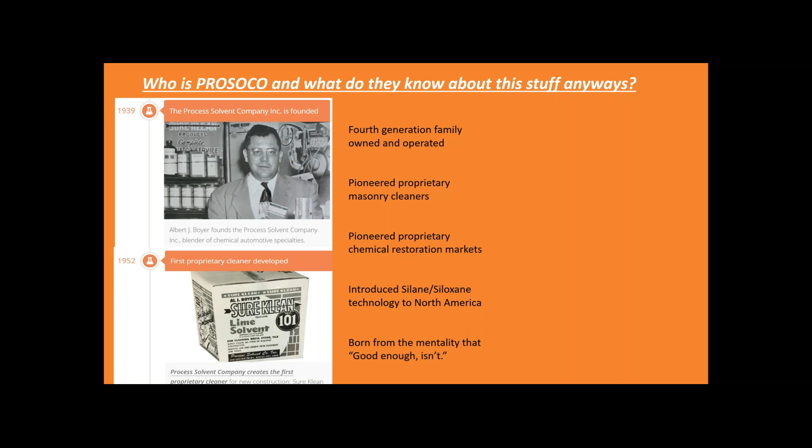We pioneered some of the first chemical cleaners specifically for masonry, as well as the new construction side, as well as in the restoration world. We introduced a line of water repellents, later introduced silane siloxane technology, which is very commonly used in protective treatment today. That's technology we brought to North America decades ago.

Really, we were founded and we still operate today under the mentality that good enough isn't. And we pride ourselves on that. So we've just celebrated our 80th year.

We've come a long way in 80 years from masonry, from what started as automotive products to masonry cleaners and protective treatments. We branched out to finished concrete flooring products, eventually building envelope products, and most recently through acquisition, we got into the masonry anchor world with the acquisition of CTP, or construction tie products, to tie it all together. Pun intended there.

So basically the moral of this story is you're not alone, and you certainly don't have to be an expert in cleaners and protective treatments. You just need to know one. I'd be happy to connect you with your local representatives after the call if you're interested.

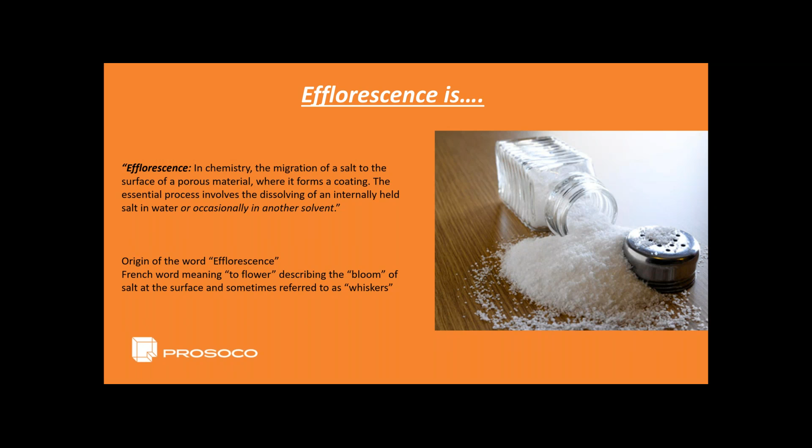We'll talk about some of those other stains that are very similar to efflorescence and how to address those. The origin of the word efflorescence is actually from the French word meaning to flower, which is how a lot of these other stains technically fall under this umbrella. It describes the bloom of the salt at the surface, sometimes referred to as whiskers.

What efflorescence most definitely isn't is effervescence, because that's not even a word. It's definitely not effervescence, that's something like Alka-Seltzer. And it's most certainly not evanescence, which is a 90s and early 2000s rock band. More often than not, the pronunciation of the word is butchered, and I get calls about these three: effervescence, evanescence, and other wrong variations. The correct way to pronounce it is efflorescence. So if you take nothing else away from this today, at least you'll know how to say it correctly now.

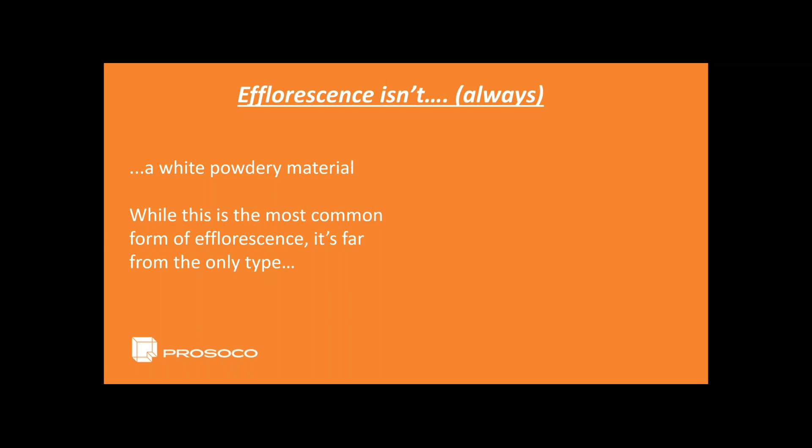What efflorescence isn't, or at least isn't always, is a white powdery material. While this is the most common form, it's certainly not the only type. Here's another example of something technically classified as efflorescence but that doesn't look like what we all know and despise as efflorescence.

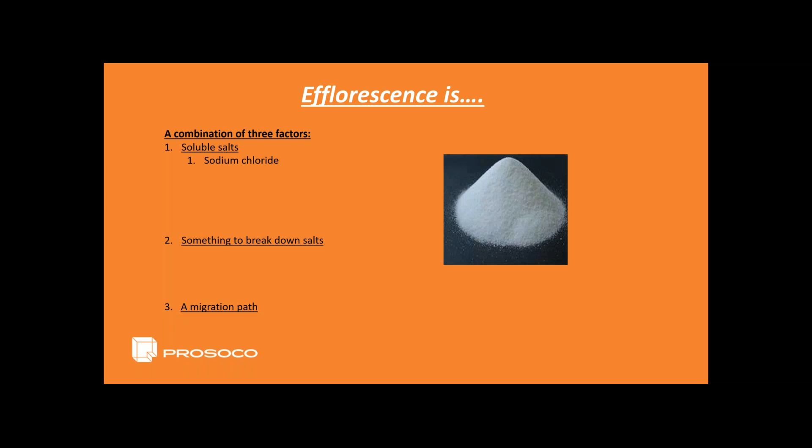What efflorescence is, is a combination of three factors: you've got a soluble salt of some sort, something to break that salt down, and a migration path for that salt, once solubilized, to work its way out to the surface. Some common forms of efflorescence are sodium chloride, calcium hydroxide, vanadyl sulfate, manganese oxide, and many more. Some of these are natural, some are man-made additives used for colors and other reasons.

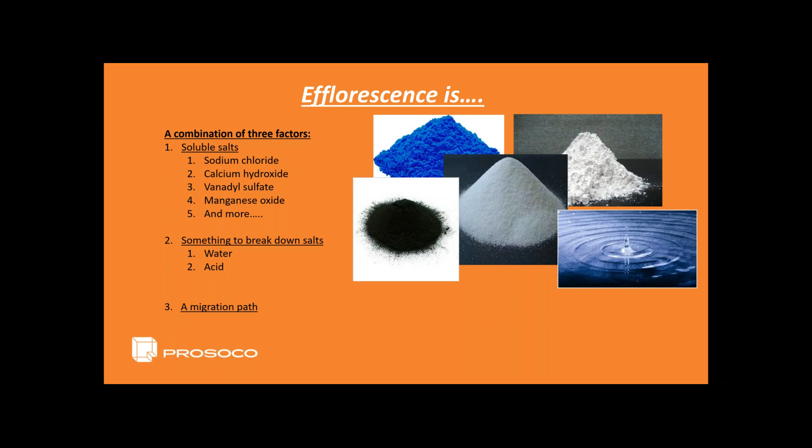Something is needed to break that salt down, with water being the universal solvent. By definition, a solvent is anything that will solubilize something else, so water is referred to as the universal solvent. Oftentimes it's an acid, and we certainly hope it's not muriatic acid - I'll touch on that probably more than once throughout this presentation, by force of habit if for no other reason. Sometimes it's some other solvent, whether a different cleaner or something of that nature.

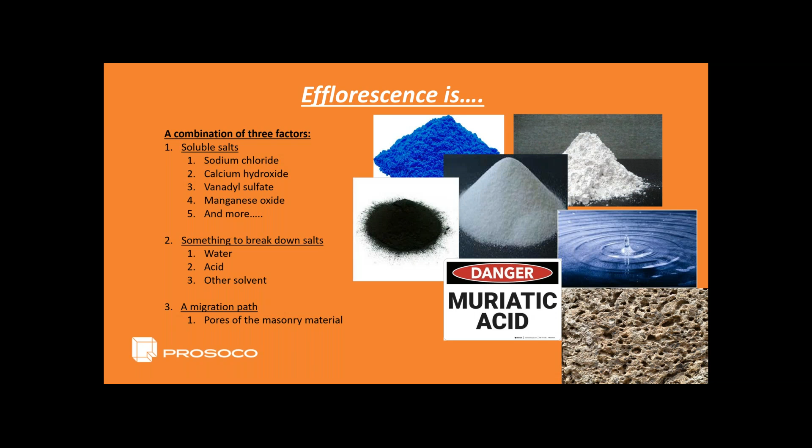As far as the migration path, the way that material gets out to the surface is that liquid, with the solids dissolved into it, works its way out to the surface. Nature, always seeking equilibrium, will move things from areas of high concentration to areas of low concentration. In the case of a masonry wall with a solubilized salt, you've got moisture within the wall, and outboard of that wall the air is drier, so that moisture works its way out towards the exterior face of the wall. As the moisture evaporates, it deposits the solids that remain onto the surface of the wall in the form of efflorescence.

As you can see here, there are a lot of different salts found in masonry, whether in the wall itself, from some sort of chemical combination as a result of a cleaning process or otherwise, or even maybe from just the surrounding elements.

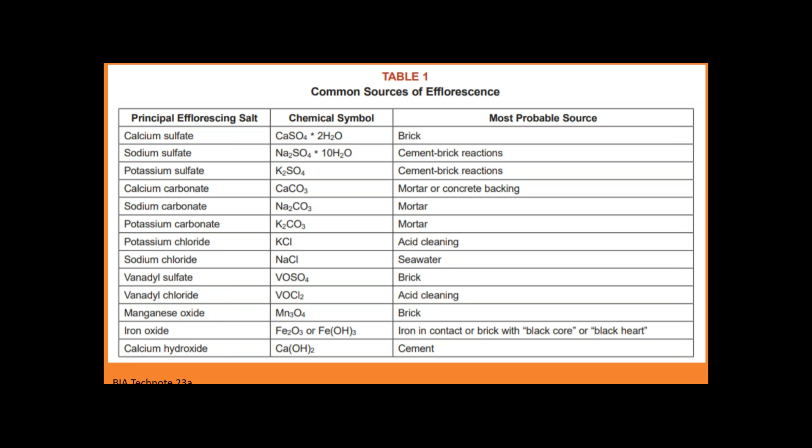Efflorescence is not always from the masonry itself, though. It comes from places like de-icing salts, maybe salt air or salt water. In a lot of cases, moisture or efflorescence can even come from the ground that we build upon, through a condition called rising damp, where capillary action absorbs the moisture and soluble salts in the ground and draws them up into the masonry from the ground itself.

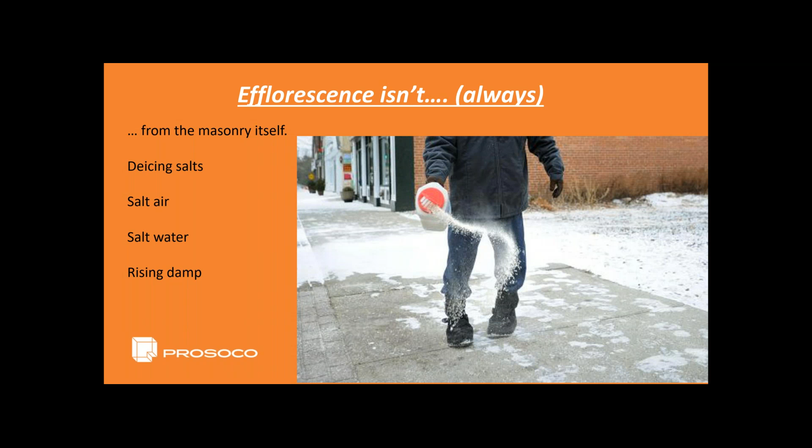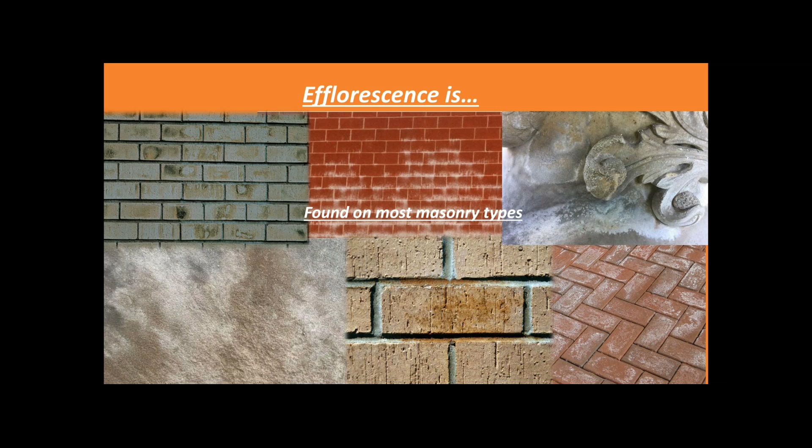Efflorescence is found in most masonry types as a result of that. There are a lot of different sources, whether it's direct from the substrate itself or surrounding elements or whatever it may be. It is found in most masonry types.

What efflorescence is, technically speaking, it's a word that can be used to define several different common masonry stains.

Efflorescence is also frequently caused by human error in some form or fashion, whether that's using the wrong cleaner or eliminating a step or a material through the construction process that results in more water in the wall, whatever it may be. It's frequently caused, or at least expanded upon, from some sort of human error.

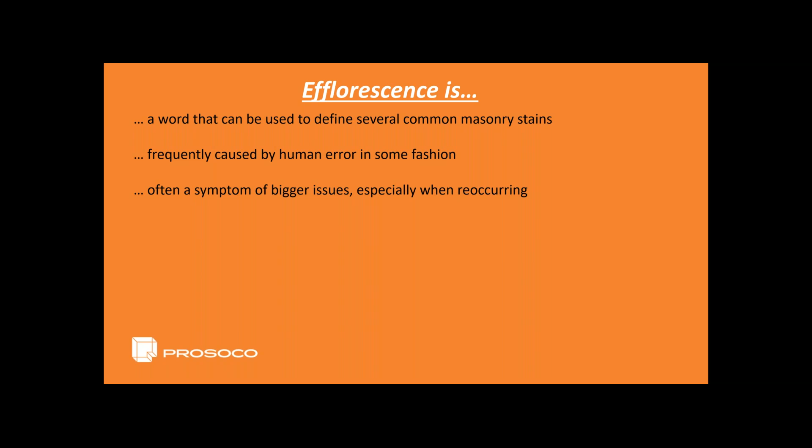Another thing that it typically is, especially in issues of reoccurrence, is it's often a symptom of bigger issues. Efflorescence may just be the thing that's visible, but there could be something else much more significant going on behind the visible surface.

Efflorescence is most commonly known as that white crystalline deposit of water-soluble salts on the surface of masonry, and that's kind of how we'll refer to it for the majority of this presentation, but do know that word can be interpreted in different ways.

The common efflorescence that we're all familiar with is relatively easily treated given the right tools and products, and certainly once it's been accurately diagnosed. However, it is commonly misdiagnosed. I get a lot of calls anytime somebody sees anything white on the wall at all. They refer to it as efflorescence or effervescence or evanescence or whatever it may be. So we'll talk a little bit about how to diagnose that.

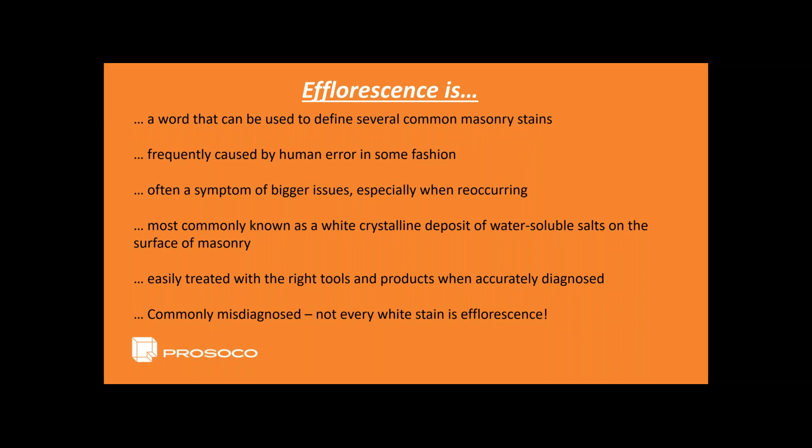The one thing that's for sure, and that we can all agree on, wherever you're at, wherever your experience level is, efflorescence is a real... you get the rest. I'll give you a second to contain your laughter there as we move on.

All right, so now that we all know what efflorescence is and what it isn't, what can we do about it? How can we help prevent this?

Well, like many things in life, if you plan and act accordingly, prevention is more significant and better, the best first step to a cure. It's greater than the cure itself. So how do we prevent efflorescence?

Prevention begins long before the building ever breaks ground and long before you ever start constructing that wall, but it actually begins in the design phase. So the first thing we can do is design our buildings—depending on what your expertise is, if you're the contractor or the mason, you may not have this luxury—but we can certainly promote it as an industry-wide thing to design our buildings to incorporate water management features.

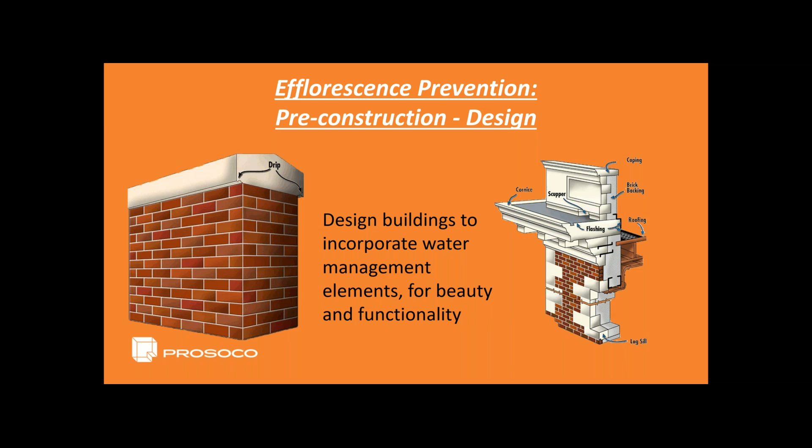They don't have to be ugly gutters and scuppers and things like that, but we can use these things for not only functionality, but for beauty as well. Here's a good example of a beautiful masonry building that's got a lot of excellently detailed water management features.

Now, we know there's not a lot of buildings built like this today, so what can we do in our more modern common masonry buildings that we see today? Well, we can start by specifying, at the very least, a water shedding joint profile.

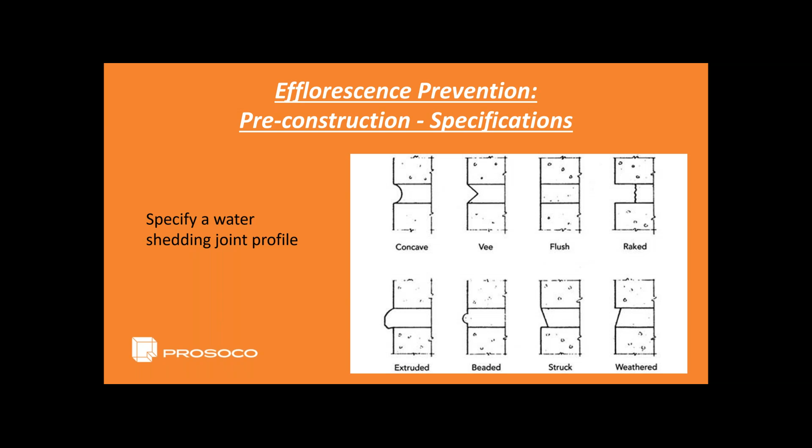Every time I step onto a project and I see a rake joint on an exterior wall, I cringe a little because I know it's much more likely to have issues than had they gone with a different joint profile. And once that wall is built and ready for its final clean down, still from the specification perspective...

We can specify a proprietary cleaner that's made specifically for the substrates on each project—not a product that worked on the last project because that was a different type of masonry, but a product that works specific for the substrates on this project.

Each substrate has a unique chemistry and requires a slightly different approach to effectively clean it without causing damage. That's our first step in any masonry cleaning operation: to first do no harm. It's kind of our Hippocratic oath that we borrow from other industries.

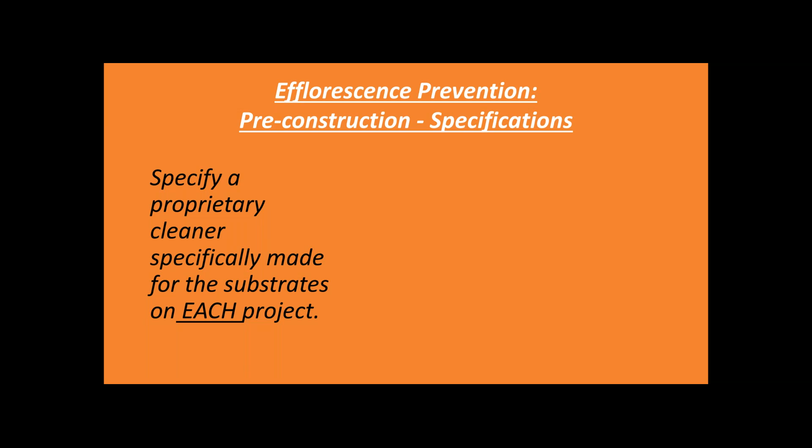While there are some cleaners out there that may claim to clean all masonry, we'll talk a little later about how just because you can doesn't mean you should. All industries, for that matter—masonry and otherwise, any industry where you're cleaning anything—recognize the importance of the appropriate cleaner for the substrate and the stain you're trying to remove.

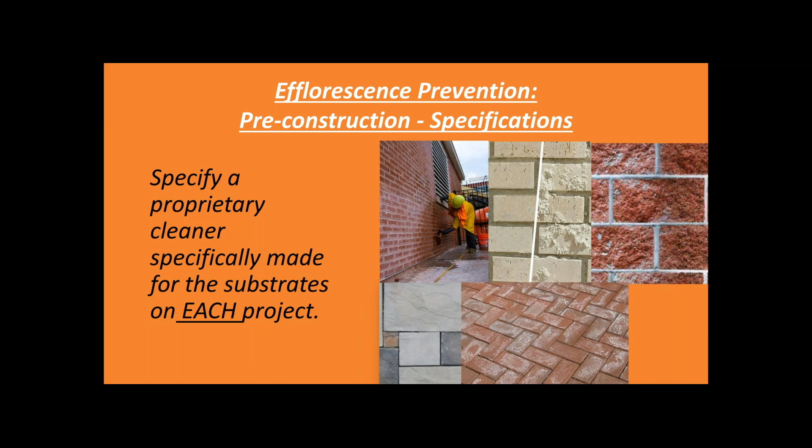One of the best and easiest ways that we can prevent efflorescence and many of these other common stains is to first never, ever, ever allow raw muriatic acid on your project to clean your masonry. For a long time, it was the only choice, but today it's recognized as one of the leading causes of a lot of different forms of damage in masonry. It's not because it doesn't work, and you can certainly make it work. You just need to be much more careful with it. There are a lot better alternatives to muriatic acid today.

This is kind of where the one-size-fits-all approach was born, because for a long time that was the only thing available. But all masonry substrates are unique in their chemical composition, and none of them like muriatic acid. Specifying a one-size-fits-all cleaner for all of your different masonry buildings and types is the next worst thing that you can do as far as causing damage and harm.

It's pretty much unanimous across the industry that one size does not fit all. And you don't have to take that from me. You can take it from all the authorities within our industry on the topic, which rarely happens, but they do all agree on a few topics. And that is that one size does not fit all for masonry cleaning. We should always seek to use the gentlest yet effective method, and products and techniques that are applicable to one masonry wall may not be applicable to others.

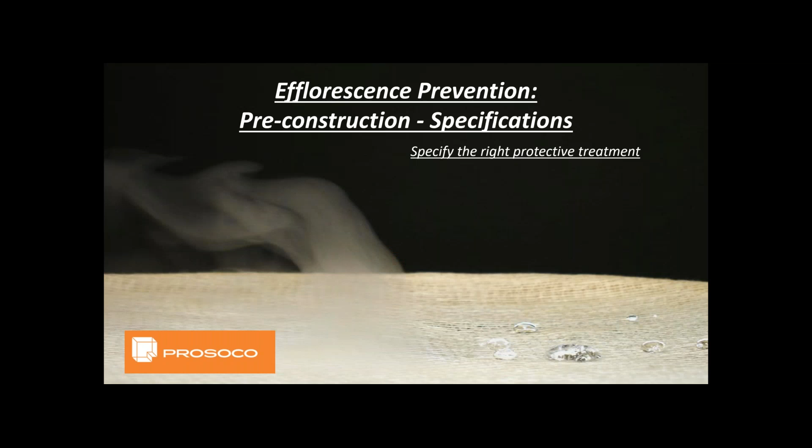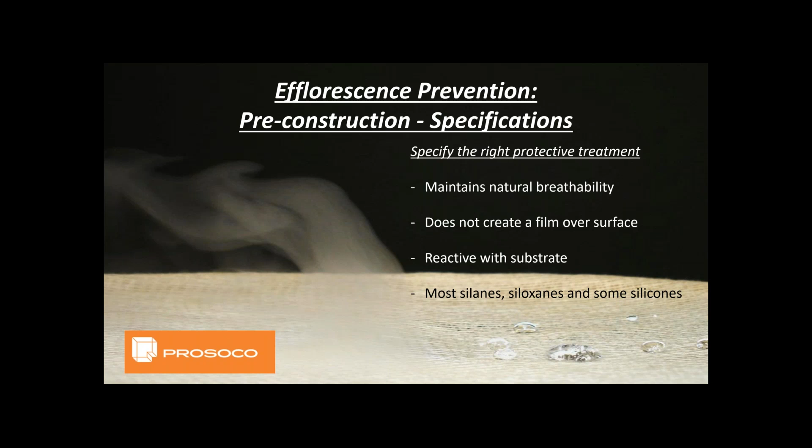So the next thing that we can do in the specification phase is we can specify a protective treatment. And we want to make sure that we specify the right protective treatment. We want to make sure that we specify one that maintains the substrate's natural breathability, one that doesn't create a film over the surface, and one that chemically bonds and reacts with the substrate that it's applied to. The most common chemistry that checks all these boxes are the silanes, siloxanes, and silicones of the world.

So now we're past the specification phase. The job is a go. We're ready to get started. What else can we do before we start constructing that wall to actually help prevent efflorescence as it goes up?

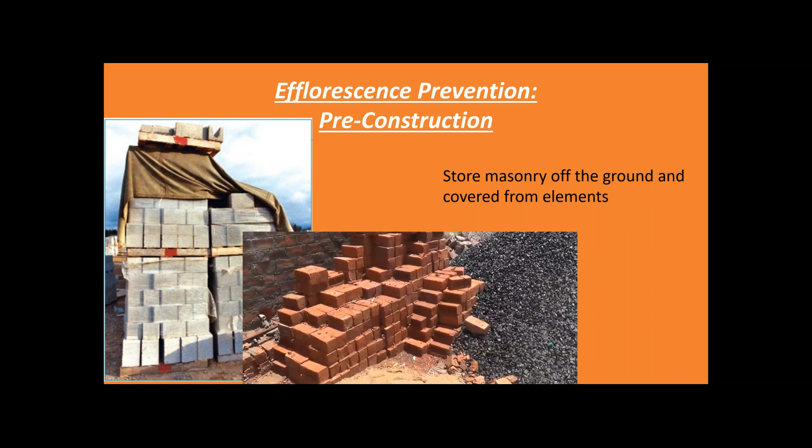Well, there are a couple more steps we can take. One may seem like common sense, but it's to store masonry off the ground and cover it from the elements. I can't tell you how many times I step onto a job site and see the masonry stored like this. It's a very common thing. Some guys take the approach of, I'll just deal with it later, but that's one of the easy steps you can take early on to help prevent efflorescence.

Next thing we can do is, as we construct that wall, build it with the understanding that water will get into it somehow, some way, whether during construction, during post-construction clean down, or through voids and cracks and deficiencies later on. So make sure that water has a route to get out when it does get in, through things like mortar collection devices, proper through wall flashings, weep holes, etc. Water will get into that wall, so ask yourself, have you provided a way for it to get out?

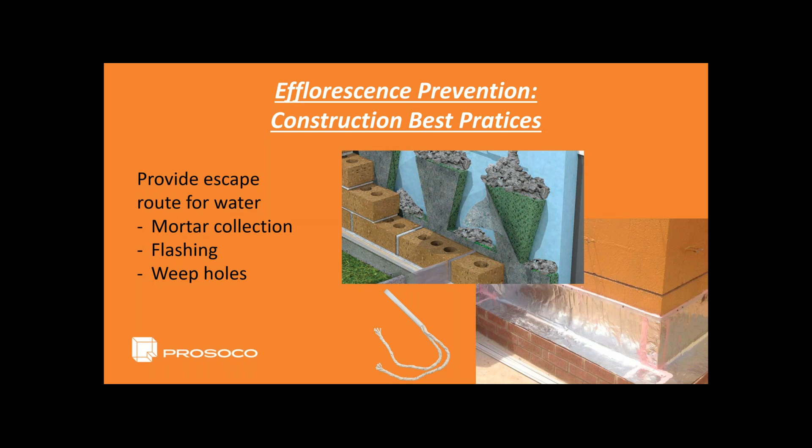The next thing we can do, as we build that wall, is follow best industry practices. Don't break out the 4-inch hole saw for the 2-inch hole, right? Make sure you're properly tooling all your joints. Make sure you caulk or fill any other voids. Make sure you're filling up your mortar joints completely. It's best practices—stuff I'd like to believe most people on this call know, but sometimes we just need reminders of those common sense things we forget about from time to time.

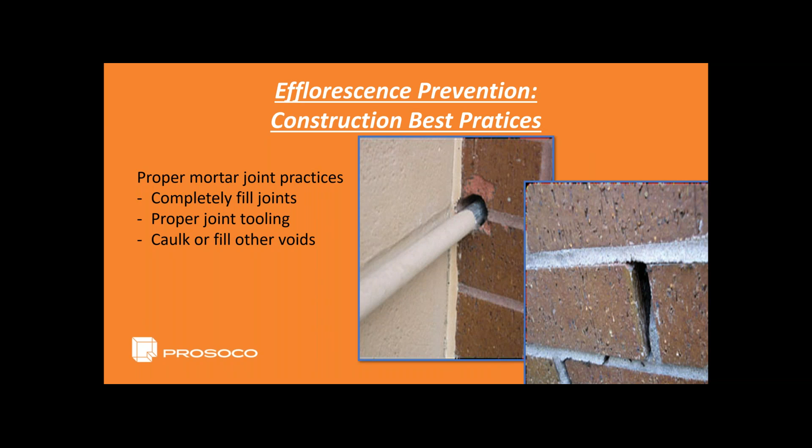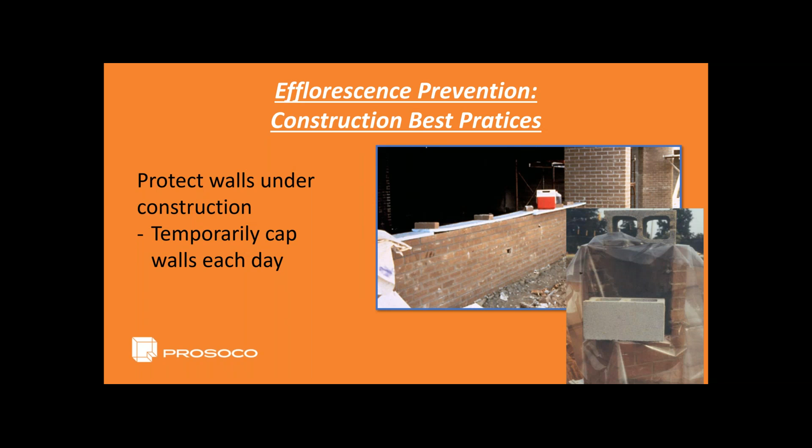Let's talk about the different methods and the do's and don'ts of removing that efflorescence if and when you do get it.

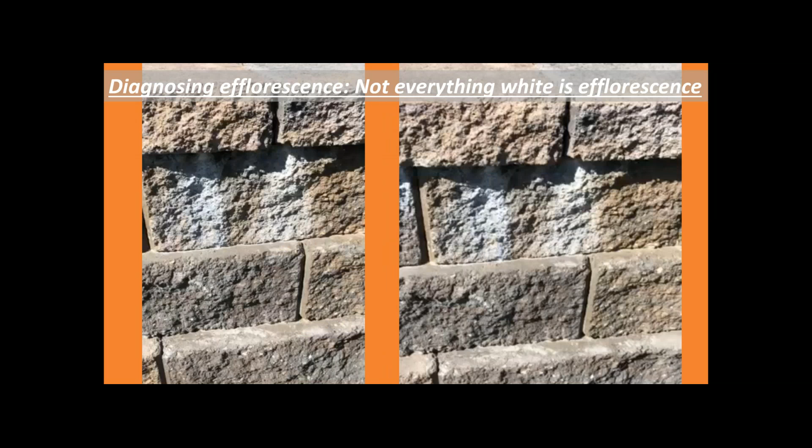So take a look at this one, for example. This is one that would be commonly misdiagnosed as efflorescence. So let's run it through the test we talked about for diagnosing. The first thing we're going to do is brush our hand across the wall and see if anything comes off on our hand.

Nothing came off on my hand there, so now I'm starting to believe this may not in fact be efflorescence. So I'm going to run it through my next test, splashing a little bit of water on the wall and seeing if it disappears. As I splash water on the wall, I notice that white stain has not disappeared at all. In fact, it doesn't seem to have been affected at all. So what's going on? Well, I don't have efflorescence in this case, and through those two quick, easy tests, I was able to realize that.

What do I have then? Well, I've got what's called calcium carbonate, aka lime run. Lime run is probably the one stain I get more calls about, where people say, hey, I've got efflorescence, need to know how to clean it. If I were to just answer that question and say use product XYZ for that, they would try that approach and be sorely disappointed when that product didn't even begin to touch what this stain may actually be. So what is lime run?

Well, it gets to the surface, and it could technically be classified as a form of efflorescence in the way that it's deposited at the surface and it blooms or flowers, if you will. But really what it is, is free lime within the masonry itself or within the mortar joints that has deposited on the surface. Over time, it reacts with the carbon dioxide in the atmosphere and goes through the process of carbonating, creating what we call calcium carbonate. So lime run does not disappear when it's wet.

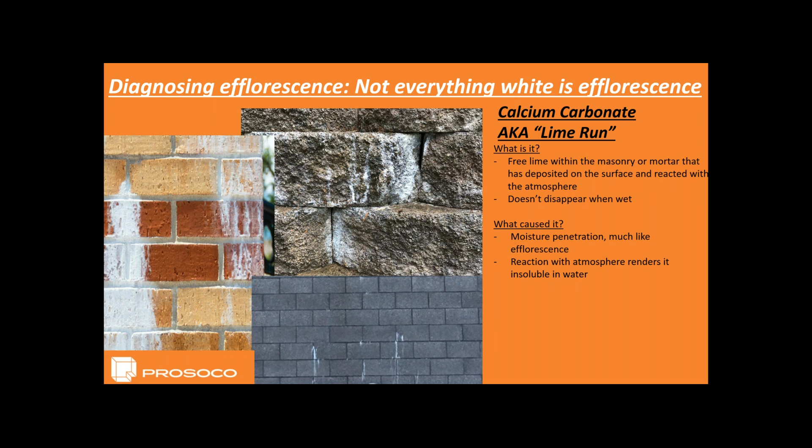What caused it? Well, it's the same thing that causes efflorescence: moisture gets into the wall, it solubilizes that free lime or calcium hydroxide, brings it out to the face of the wall, and as that water evaporates, it deposits it there. The difference with lime run versus common efflorescence is that the atmosphere has now rendered it insoluble in water, so you're going to need something more aggressive to get this stain to go away.

As far as removal, the first step is to always mechanically remove as much as possible. That's classified as the least aggressive means, and then use the proper proprietary masonry cleaner specifically designed to address that condition. How do I prevent it? Well, you just keep as much water out of the wall as possible—the same means of prevention as far as preventing efflorescence.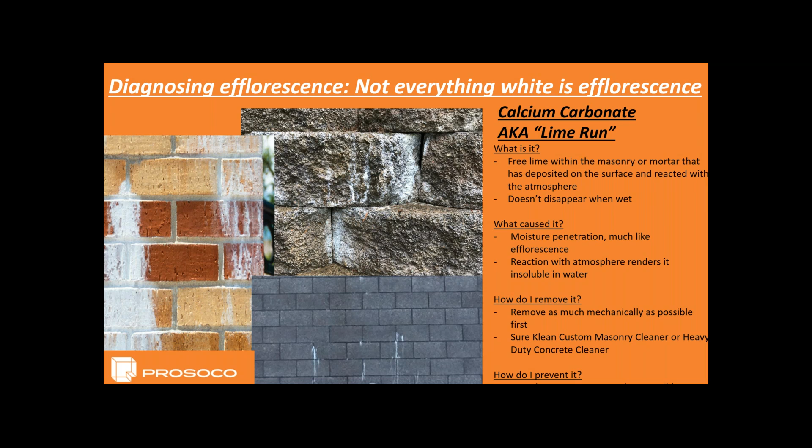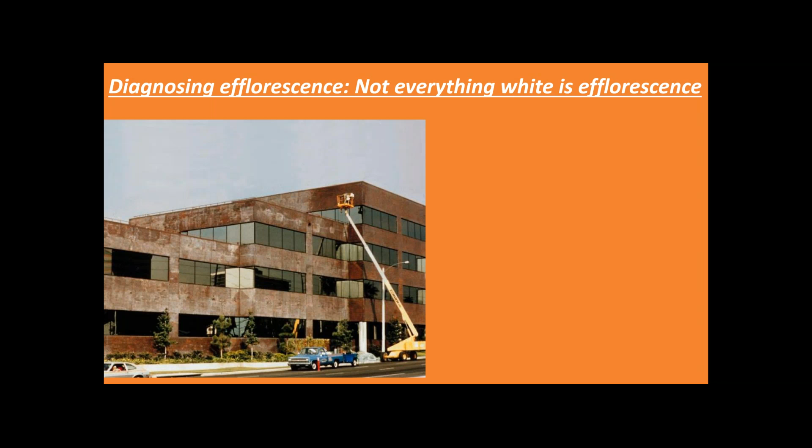So this is another one that pretty much everybody that looks at this picture, the first thing that goes through their mind is efflorescence. Well, if you look a little closer, what's actually going on here is a condition called sealer blush. What happens is you've applied a film-forming sealer over a substrate that had too high of a moisture content. Now, whether that was from a weather event like rain, or if you applied the protective treatment too soon after the initial clean down, whatever that may be, you've got moisture behind that film-forming sealer. This can also take place if you apply a breathable penetrating product far too heavy. If I put it on at 25% of the suggested coverage rate, I can have this condition as well. But sealer blush is another one that's commonly misdiagnosed for efflorescence. You can see why in the way that it looks.

The best thing you can do as far as removal is remove it with some sort of stripper or a product specifically designed to digest the component sealer is made of. And to prevent it in the future, use a non-film-forming, penetrating, breathable protective treatment. We'll talk a little bit more about that here in a minute.

Now this one, while it does technically fall under the classification of efflorescence, is actually more commonly diagnosed as something else, a biological stain. They see the green coloring and think, oh, I've got some sort of moss or algae or lichen growing on my wall. What it really is, is vanadium. What causes vanadium is those free vanadium salts that are oftentimes used within some manufactured masonry products, sometimes for color and other effects. But if they're dissolved in water, or oftentimes the most frequent culprit of this particular stain is muriatic acid, it gets in, breaks down those salts, and brings them out to the surface and deposits them there.

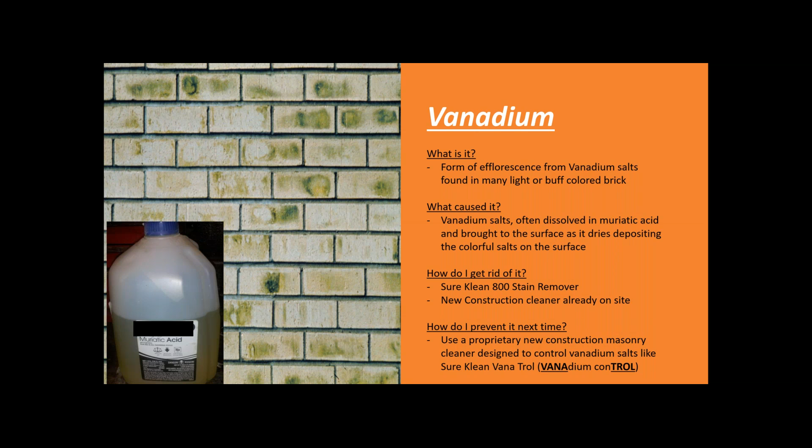Another form of efflorescence by definition is called brown manganese. This gets out to the surface in the same way all the other forms of efflorescence do, water, or again, this is another condition commonly caused by the use of muriatic acid. It breaks down that manganese oxide within the substrate and brings it out to the surface, deposits it there, where it is later rendered insoluble in water. Again, a proprietary cleaner specifically designed for that, both to remove it, and as far as prevention goes, using one specifically designed to prevent it.

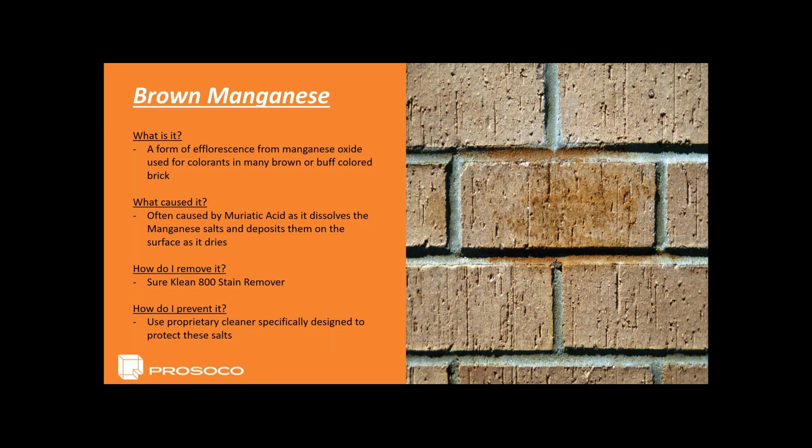So efflorescence, now we know what it is and what it isn't. We know some of the common steps and the easiest things we can do to prevent it, or at least reduce the likelihood of it happening. We know how to diagnose it when it does happen.

And we know how to fix efflorescence, as well as a lot of the other things that we thought were efflorescence. So it's finally time to address removal of actual common efflorescence.

One thing all industry organizations agree on is that you always want to start with the least aggressive means necessary that can get an effective result.

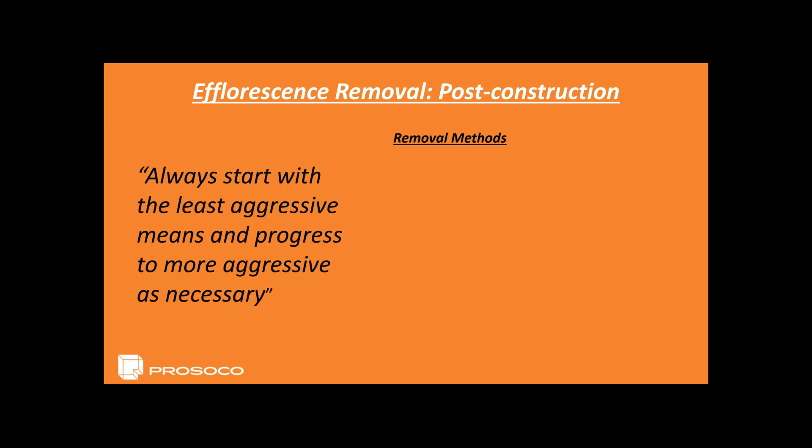As far as the different methods for removal, the least aggressive would typically be the mechanical removal method. You saw in some of those quick videos how loosely bound that material is to the surface. Oftentimes, just a stiff brush will brush common efflorescence right off of the surface.

You never want to use a metallic scraper on masonry, certainly not in combination with any form of acidic product. We all know metals and acids don't typically play well together.

In addition to, or in place of, a mechanical removal, a water rinse oftentimes can get the majority of that efflorescence off. Now, some of that may come back as it dries if you haven't fully dissolved it and removed it from the wall.

So that removal is often temporary. But one thing you certainly don't want to do is use high pressure, as you can drive that water deeper into the surface, making it harder for it to dry out, and in turn mobilizing salts that were at one point deep enough into that surface that they never would have naturally been brought out.

If you do need to step it up to the next method, chemical removal, make sure you're using a proprietary cleaner that's specifically designed for the substrate you're working on and the stain you're trying to remove. And always start with a mild dilution and work your way up as necessary.

If you start with a mild dilution and it's ineffective, the result is you still have the same condition you had. If you start with a very aggressive dilution or a very aggressive product, and it has adverse effects, those are a lot of times much harder to reverse, or in some cases even irreparable.

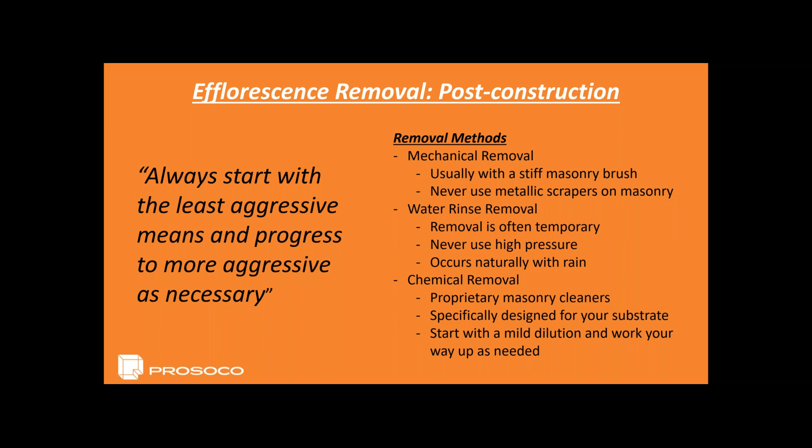I haven't driven back past it today, but I've got to believe that it's probably right back where it started, or close to. So what caused it? Well, it's the natural salts present in the masonry, oftentimes the ground itself, or even sometimes the air or the water that surrounds it.

In some conditions, salt water can cause efflorescence. You'll see that a lot of times on bulkhead walls around marine areas.

How do I remove it? Well, you're going to want to use, again, starting with a very mild product, typically a hydrochloric acid-based cleaner. If you've already got it on site and you're doing your new construction cleaning, a mild dilution of that can be very effective.

If you're there just to address the presence of efflorescence, you're going to start even a step back from that with some sort of other acidic blend. Ideally, phosphoric and gluconic acids have been proven very effective on efflorescence.

My personal go-to product is one of ours called light duty concrete cleaner. That's a very effective cleaner for common efflorescence.

And then as far as prevention, we talked about it already. Complete prevention is very tough, but you can do a lot of very easy things to reduce the chances and certainly reduce the significance of the efflorescence if and when it does bloom.

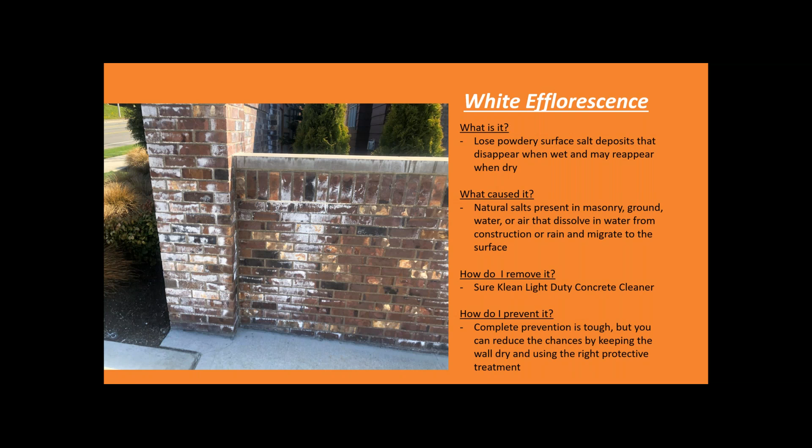And then as far as preventing reoccurrence, you want to make sure and use the right protective treatment to keep the water out of that wall once it's done. Once it's gone, you want to keep it gone by using the appropriate protective treatment.

Now, much like cleaners, there are different protective treatments designed specifically for certain substrates. Different types of stone contain different elements. Some contain silica, some are comprised of calcium carbonate. Those two react differently in the presence of things like silanes and siloxanes. I've got other presentations that really get into the specifics of that if you're interested. But for now, just know that you're going to want to use the appropriate protective treatment for the substrate you're working on.

And you want to make sure that it's breathable. You want to make sure that you allow that water, as it turns from liquid water into vapor, to work its way out. Now, this is a quick illustration.

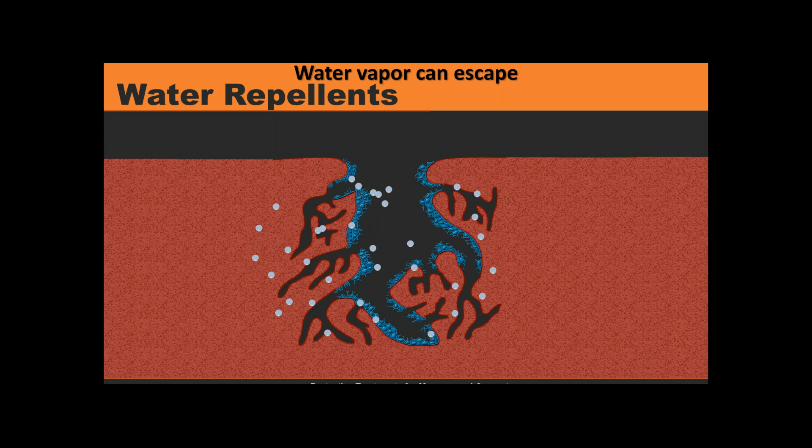But they work by lining the larger areas of the pore structure of that masonry, which allows it to keep the liquid water out, keep that large bulk water from penetrating, yet while still allowing the smaller water vapor molecules, as they're broken down, to work their way out of that substrate.

So when masonry is cleaned and protected, it's one of the most durable and one of the most beautiful and sustainable building materials that we've got available to us today. With a couple of easy steps to take during the pre-construction phases as far as prevention, during construction to prevent efflorescence and other stains by keeping water out of the wall, and thereafter by cleaning it with the appropriate cleaners and protecting it with the right protective treatments, we can make sure that masonry remains a viable choice for years and years to come.

So what did we learn today? Well, we learned what efflorescence is. It's a French word meaning to flower, which by definition can include a lot of other types of stains. We learned that in general, though, it's a salt of some form that's been deposited at the surface of the wall. We learned that it certainly isn't effervescence or evanescence or any other pronunciation.

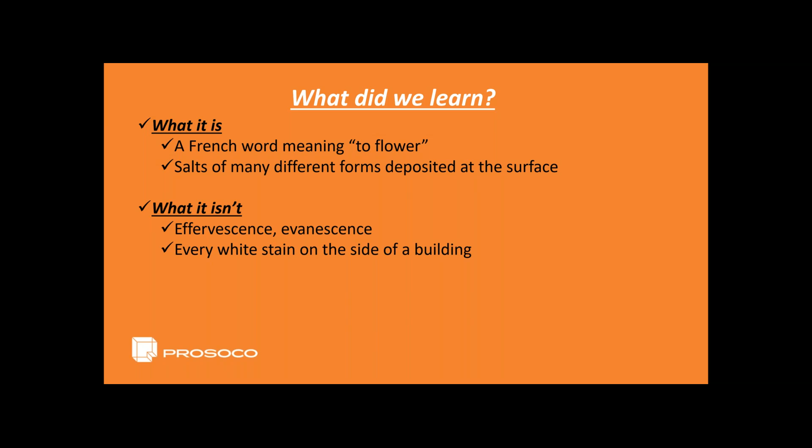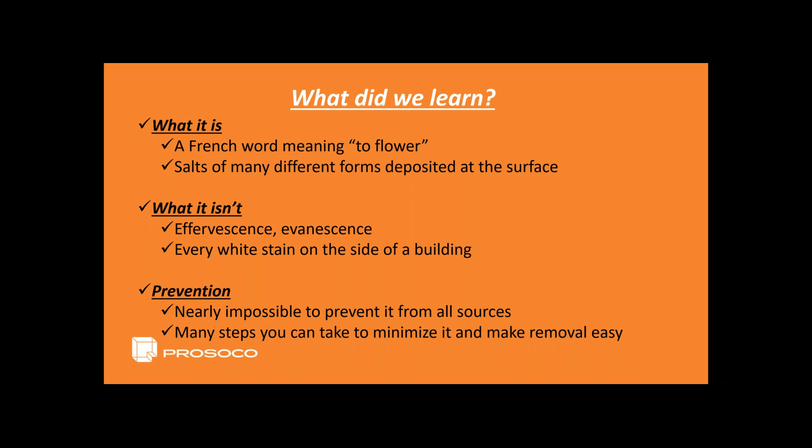And it's certainly not every white stain that's on the side of a building. It is responsible for a lot of them, but many of those other stains need to be addressed in a different fashion than common efflorescence. We learned that prevention is nearly impossible because of the number of different sources of that water and of those salts. However, there are a few steps you can take to certainly minimize it and make the removal much easier than those other conditions that may be much harder to remove.

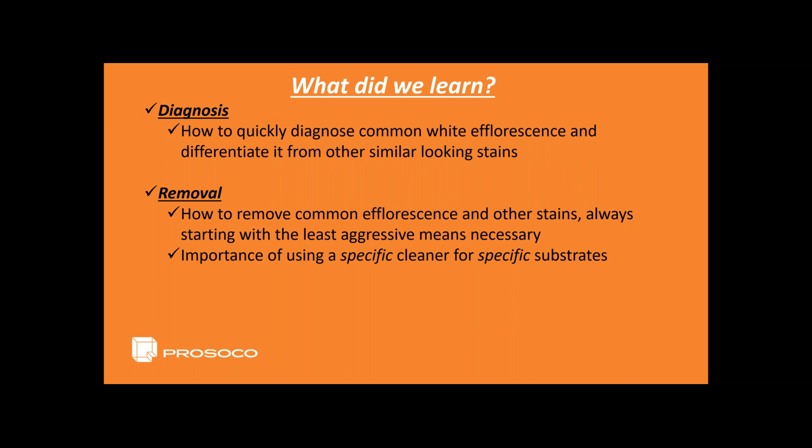We learned how to diagnose efflorescence. Just a quick splash of water or a brush of the hand or even a stiff bristled masonry brush can quickly differentiate common efflorescence from other similar looking stains. We learned how to remove it, as well as a lot of those other stains, by starting with the least aggressive means necessary and working your way up. We learned the importance of a specific cleaner for the specific substrates, and that one cleaner does not do it all, or at least shouldn't do it all.

And we learned about protection and how to make sure that we reduce the amount of water that gets into that wall before, during, and after construction being done with the proper protective treatment.

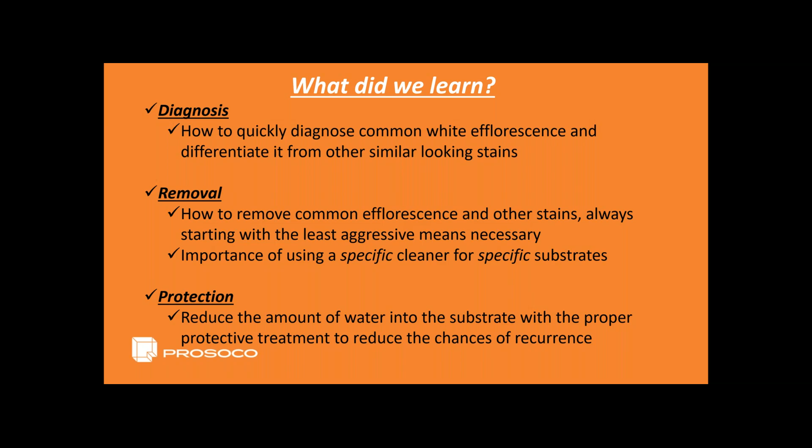And again, I certainly hope that you learned that you don't need to be an expert in cleaners and protective treatments. You just have to know one, and everybody's got - I'll put my number up here again in a minute. You've got our 800 number that will always be answered by a live person, and you've got a wide support network across the country for on-site support. When cleaned and protected properly, masonry will continue to thrive as one of the most beautiful materials available on the market. And I hope that you got something from this today.

So I think that's about all that I can possibly talk about salt without some additional prompting questions. So I'll open it up now if anybody has any questions. All right, great. Thanks, Jake.